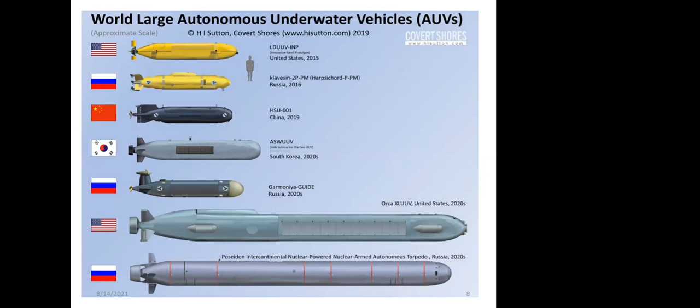Okay, now the next one is unmanned ground vehicle. Just watch the video, after that we can come back to it.

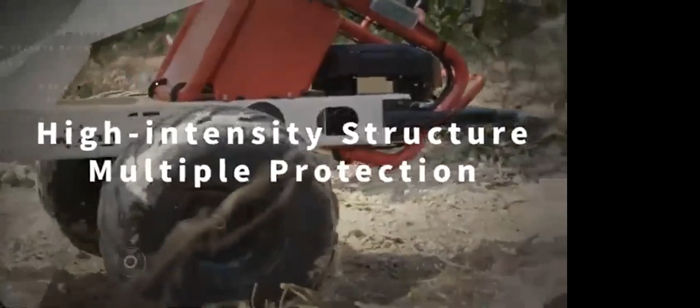Actually, this is a sample unmanned ground vehicle. I don't want to show you the prototype and other things; what I want to convey from this particular video is...

Nowadays unmanned ground vehicles we are using for so many purposes. As I said, agriculture, military applications, and for delivery applications of goods. So many things we are using it for.

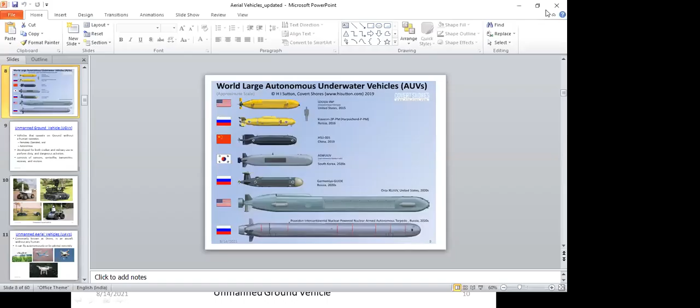What we can do actually, based on the experience with our students, I want to give you one small video so that you will understand what we can do in unmanned ground vehicles. Just watch this video so that you will understand.

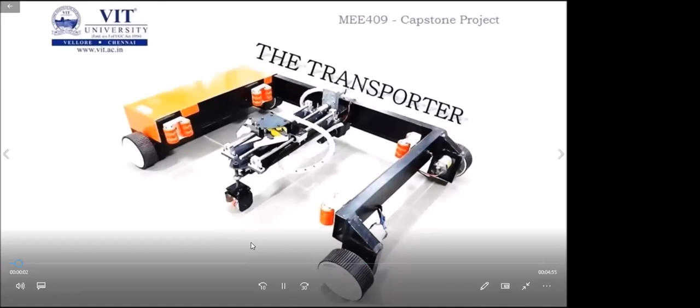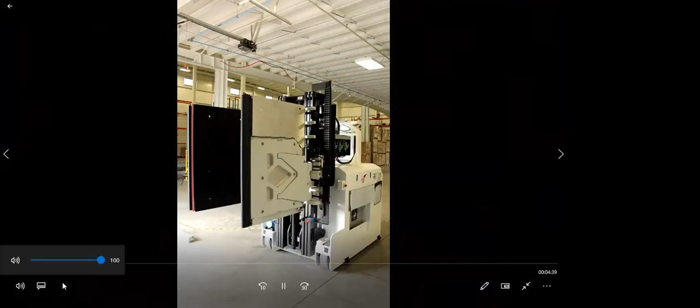So wherever warehouse application is there, we can use this kind of unmanned vehicles. So these many companies are there which are involved in material handling applications.

Just think of it. Okay, but they are developing all these unmanned ground vehicles for delivering goods. These many companies are there.

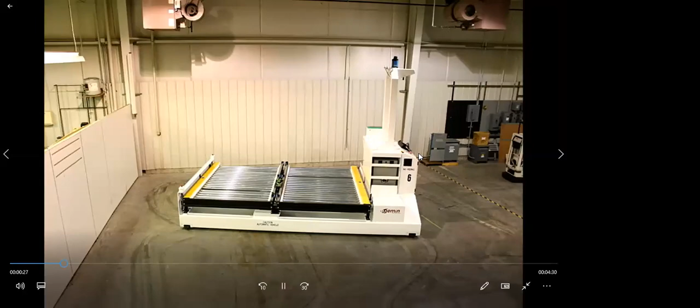These are some of the operations of that. Just watch the video, then I will convey to you what kind of work you have to carry out.

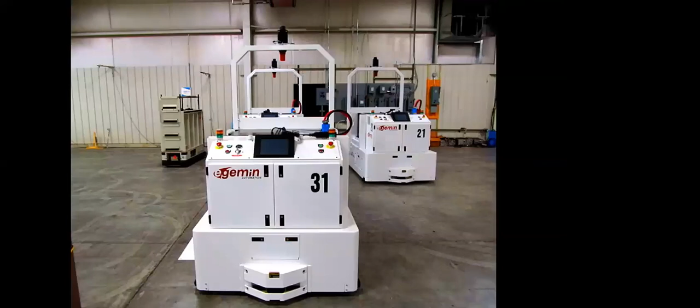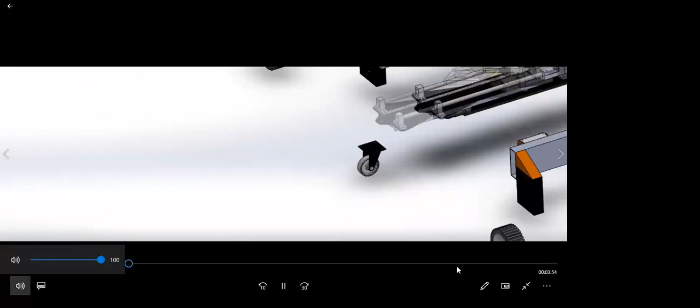Sir, it's a bit hard to hear the audio. Okay, sorry for that. Please can you use the headphone? Otherwise I will share this video with you. Will that be fine? Okay sir, at present.

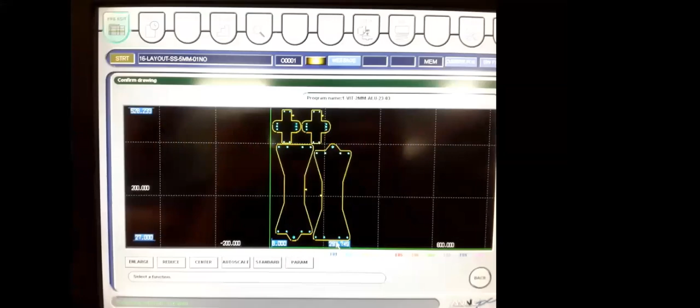So what I want to convey is, we got impressed with all these things. Oh, these many companies are making material transferring robots. So what can we do as engineers?

So what we did is we got an idea from all these things, and we wanted to do a kind of material handling, semi-autonomous or autonomous vehicle. This one is manufactured in VIT Chennai.

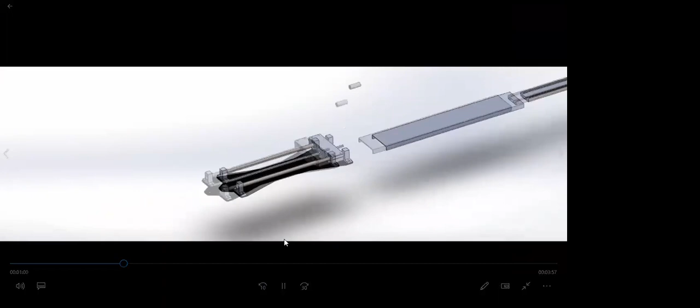So you know that mechanical engineers, or any engineer interested in designing, can design like this. We have used SolidWorks for that. This is our own design.

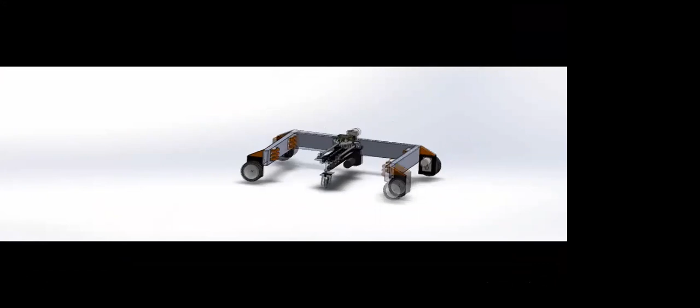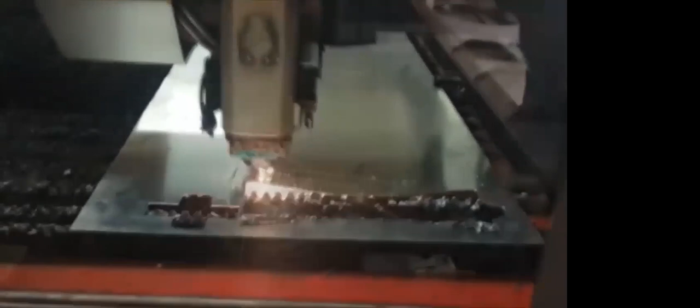And then what we have done is we started manufacturing that. We have taken sheet metal with some thickness. All these things are done in VIT Chennai itself.

And then we have made the frame. This is the frame actually. After that, as usual, you know, coloring and other things.

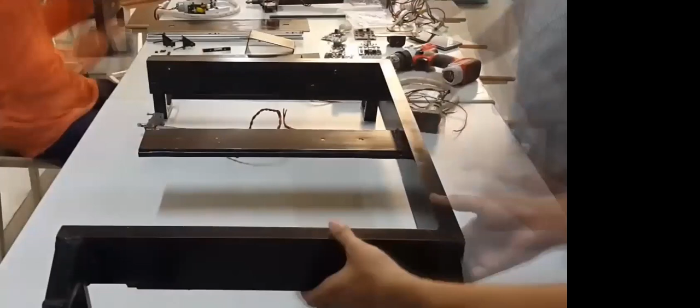So these are the parts what we have fabricated, and then we have assembled it. That's what I meant - if you want to develop any kind of vehicle, we need all the disciplines of engineering involved. Then only can we do all these things.

You see, wiring, everything done by us. So based on the wiring, the structure will vary. The placement of the controller, the structure may vary. You can see here now.

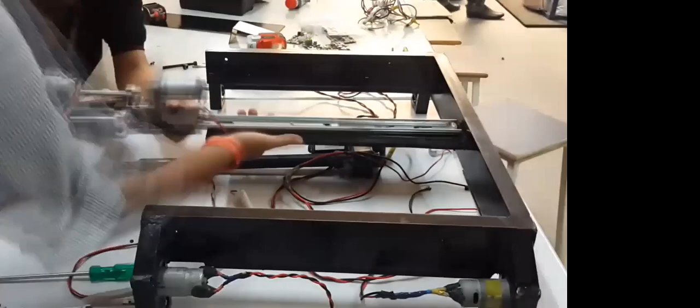So we have fixed everything according to what we planned. And we need another setup to keep the controllers. You will see now how we have placed the controllers.

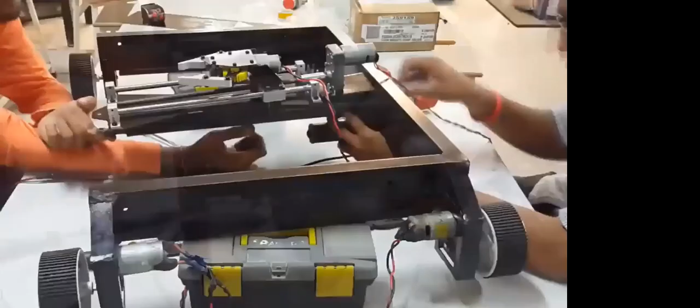So these are the assemblies. Based on the requirement, we have modified the wheels also, and additional support wheels also we have given for 360-degree movement.

See here, now we have given additional support to keep all the controller system related things, all the ICs, everything. So all these things are based on the idea we have made it.

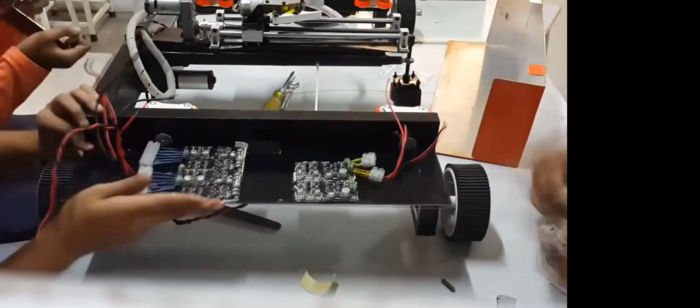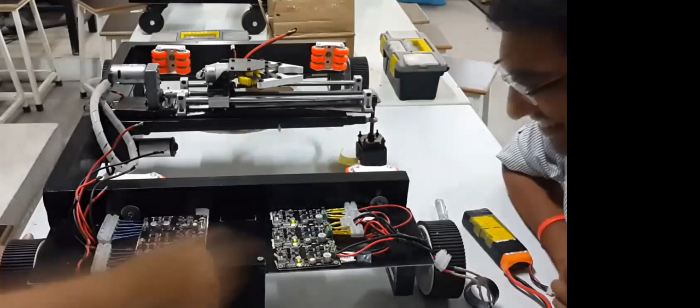So these are the circuit boards and other things, control systems diagram. And then programming, as I said, we are checking it one by one, how it is used. So when we are building the things, we learn so many things.

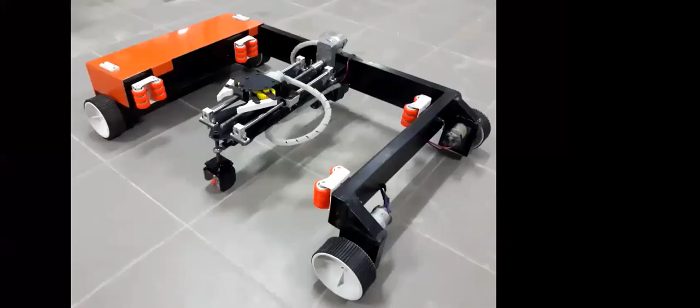Initially we checked with manual mode, and then after that we made it automated. This is purely based on the video what we have seen in Amazon.

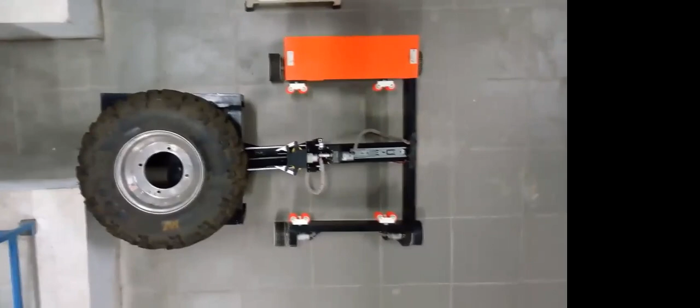Then we wanted to make this one prototype, and give it to maybe a railway station, or an airport area, where it will be used to carry materials or bags or anything like that. We only plan it, and we filed a patent for that.

So all these things are unmanned related things. Anyway, we will see the aerial vehicle soon. This is a ground vehicle.

This is the important thing, why we have manufactured this and why we have tested this: an automated guided vehicle control system. You will see all those things, how it is delivering and how it is coming back. This video will only help us to show that product.

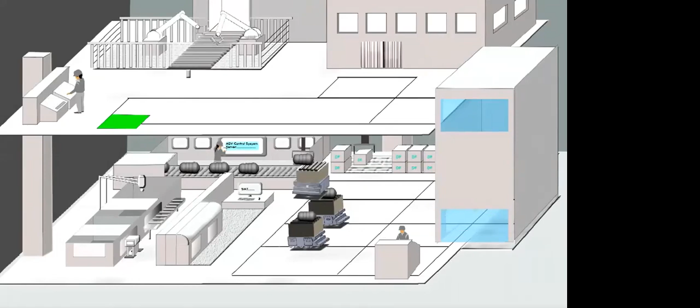This is nothing but factory automation, otherwise called warehouse automation. This is the team actually.

What I want is, whatever you are learning from this particular course, try to implement it as a project. Then only we can learn more about that.

Now coming to unmanned ground vehicles: vehicles that operate on ground without a human operator. They can be remotely operated or autonomous, developed for both civilian and military use, to perform the 3Ds of robotics: dangerous, dull, and dirty activities. All these vehicles have a sensor, controller, transmitter, receiver, and motors. These are general descriptions about this.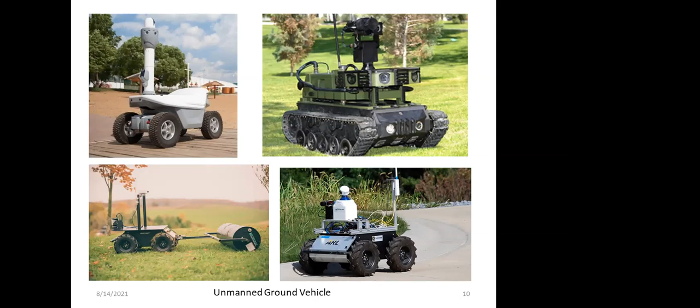These are some of the other unmanned ground vehicles used for various applications: one is for surveillance, another one is for applications on the ground, another one is for military purposes. Now we are coming to our area, that is unmanned aerial vehicles.

Maybe I can play a video for you. Hope the screen is visible. Yes sir, okay, thank you.

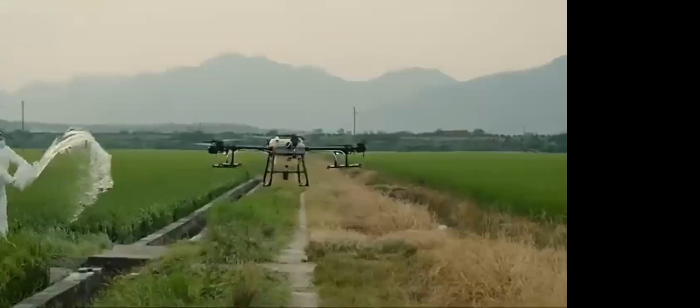This sample video I have taken for showing you the unmanned aerial vehicles. This is not the only application, but majorly we are concentrating on farming, because food is the important thing in our life. Agriculture is booming, it is needed throughout our life. So we are concentrating more on unmanned aerial vehicles in the agriculture area. That's why I have put that particular video.

Commonly known as a drone, it is an aircraft without any human, that is an unmanned aerial vehicle, and we know very well it can fly autonomously or be piloted remotely. Most of you would have seen it because of the COVID condition: wherever people were crowded, where we could not reach in short time, we used to send a drone and monitor that, and give an alarm to them. Other things also there, to see what other areas are there and take pictures, so if any modifications are needed, we can check with this unmanned aerial vehicle.

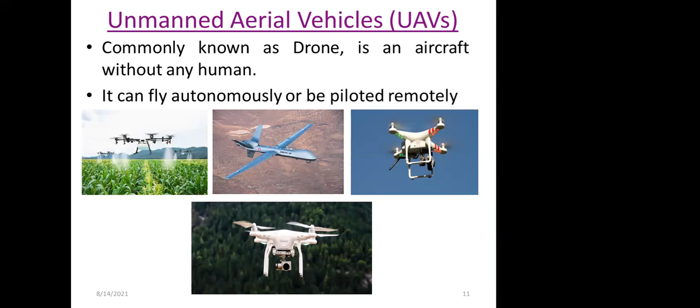Whichever area you want to concentrate on, whether it is autopilot or you want to remotely pilot the drone, or you simply want to send it for security purposes, or use it for agriculture purposes, it's up to you to decide. We are just giving some glimpse of that.

Now we will come to this, as one of our professors and also students asked. We have different types of drones: multi-rotor, fixed wing, single rotor, and fixed wing hybrid VTOL. I want the people who are working in this area to give me some suggestions: which one will be good for what purpose? Anyone?

Multi-rotors for agriculture, very good. Multi-rotor agriculture, why? Whenever we say something, a reason should come, why? So they can have more payload. Very good word, well said. Sir, they can hover in one place, multi-rotors. So multi-rotors can be used for payload, for search and rescue. I accept it.

Fixed wing drones can be used for mapping and surveillance. Oh yeah, that is generally for mapping, surveillance, and military applications. But my question is, why should it be multi-rotor? That is my question actually, not only my question, the students here also ask: why should we have multi-rotor, why not fixed wing?

More control about the orientations and motions, I think so. Okay, that is correct. Multi-rotors have VTOL and stall capabilities, so in space-constrained zones, multi-rotors are more efficient, and the fixed wing drones are more cost effective. Very good, that's only what I wanted to know.

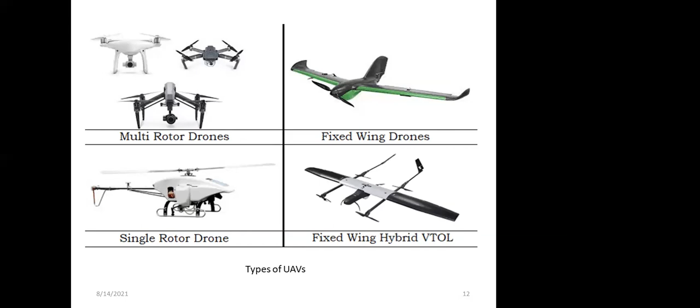The thing is, what I want to convey is recently we got some papers from IIT. Actually, they started working on fixed wing drones more than multi-rotor drones because of the dynamic instability. Just want to give a light on that; in detail we will see later. From this slide, you have to understand various types of UAVs are there: multi-rotor, single rotor, fixed wing, and fixed wing hybrid. That is the thing you want to know. In detail, we will study in the forthcoming classes.

Okay, now based on this particular presentation, I think one video we have seen. I want to give the unmanned vehicles conclusions. So what are the things we have seen? You know that underwater vehicles we have seen, and surface vehicles we have seen. All these things are in the infancy till now.

In underwater vehicles, the segment is maturing more rapidly due to the commercial use of this system by the offshore oil and gas industry. So those who want to go abroad and settle, and also those who want to work in the industrial area related to oil and gas, please concentrate more on underwater vehicles also. That will be an added advantage.

You know that we are taking oil and gas through the pipe only. For pipe inspection, we need underwater vehicles. Am I right? We are taking gas and oil through sea, right? Most of them from the sea only. Am I right? Yes, sir. So we are having huge pipes.

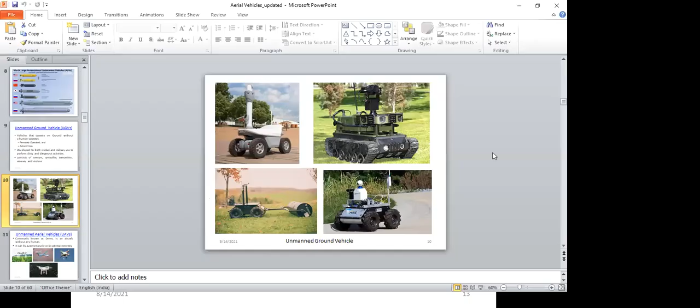I think we are having one video. I think I can play one. Maybe it will give some light to you. Just a minute.

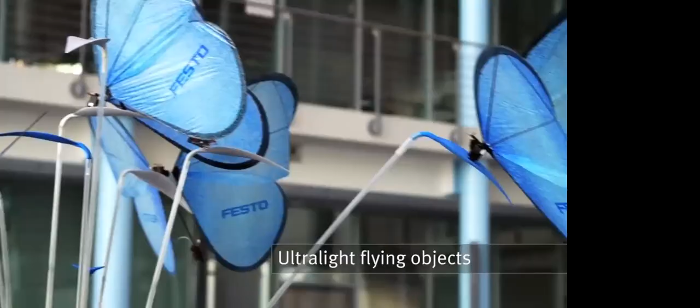So as you said, this unmanned aerial vehicle, Festo has created this. Hope you have watched this video, but just see that, as you said, actuator in micro and nano scale or millimeter scale. It's actually not a butterfly, it's a flying object, bio-inspired, biomimicking. Just think of it, what you said is here actually - that actuator is their own design. So what are they actually creating their own actuators for the control, sir? Exactly, you see that control is done by the magnetic effect, everything - highly integrated on-board electronics. Got it? So like our friend said, MEMS and everything, we have to create our own type of electronics apparatus. Just watch, after that we can have a discussion.

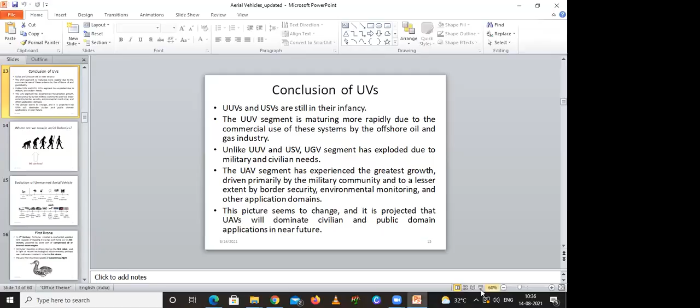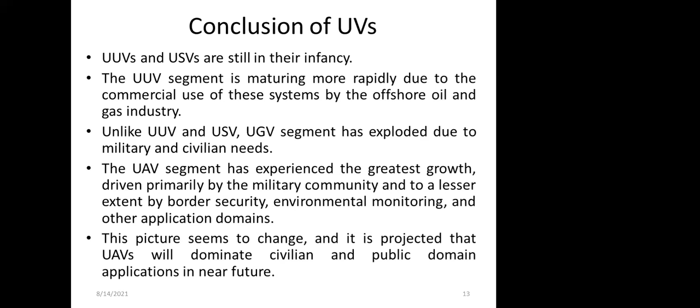It's a simple thing I want to convey to you. So as you asked, actuators we have to design by ourselves. As you said, noise and other things we can come across - wherever the thrust is there, definitely noise will come. But we have to find the actuator or controller which is not producing that much noise. That one we have to make on our own - own actuator design.

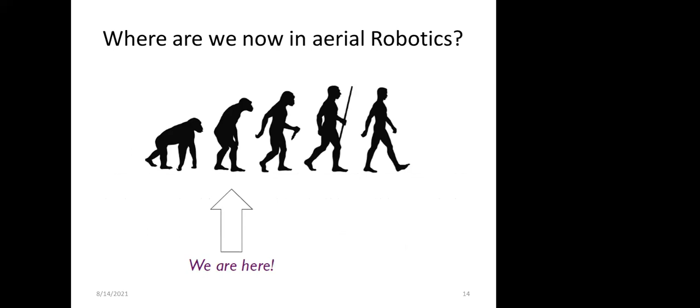So coming to our aerial robotics, actually we are in the second stage now. Long way to go. Now we will see the history of unmanned aerial vehicle. I hope this will be a help to you.

425, 1483, 1754, 1783, 1840, 1860, 1849, 1900 - Tesla. 1917, 1924, 1935, 1944, 1946, 1955. These many variations you can see, the growth you can see in unmanned aerial vehicle. Did you come across all these things?

Any idea about this? Did anyone come across any of this in unmanned aerial vehicle? Did you hear? Sorry sir, please repeat again. Whether you came across the growth of unmanned aerial vehicle - where it started, 425, now we are in 2021.

I remember hearing about Da Vinci's helicopter. Yeah, exactly, Da Vinci, even I also - but this is new to me. When I went to refer some slides, 425, I got shocked actually yesterday when I was researching. 1483 I knew, Da Vinci I knew, but 425 itself, boy. You know who started unmanned aerial vehicle.

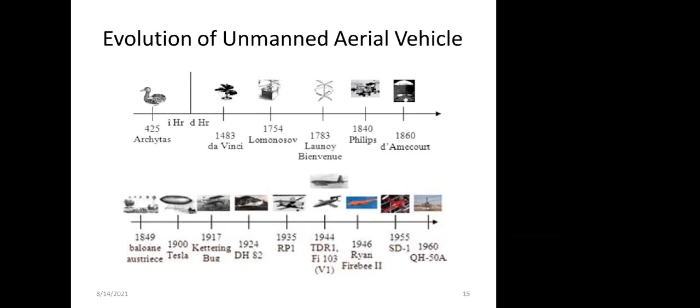We will see a few of them and then proceed further. The first drone is from the 4th century. You know who created it? A mechanical wooden bird capable of flapping its wings and flying up to 200 meters. Please make a note of it. What I'm saying is these are history - anyway I will share the PPT with you. But you have to know that once you write it, you won't forget it. So: mechanical wooden bird capable of flapping its wings and flying up to 200 meters, and it is powered by compressed air or an internal steam engine.

So they are citing this as the first robot, but you know, the term robot came in only in 1920. Before that, we didn't use the word robot. After that, we said that this particular drone is the first robot.

This seems very advanced for the 4th century. Exactly, you see the complexity involved in that. Even we can do that, right?

A lot of what you said is correct. When we are seeing it now it seems complex, but it's quite good. They have done it, and you can see that it could fly up to 200 meters using compressed air and an internal steam engine. This is also bio-inspired. It's the very first machine capable of autonomous flight. Okay, fine, shall we move to the next slide?

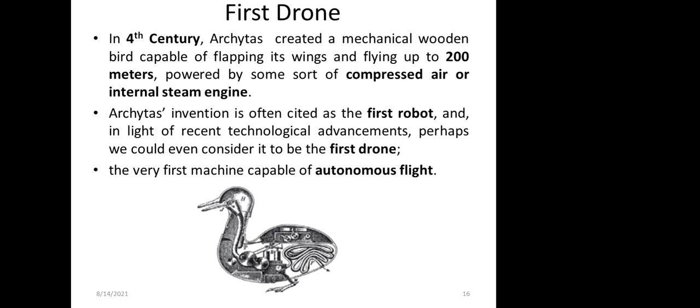Okay, but the book is written after that, so they would have used the actual terms that we are using now. Okay, this is about the first drone.

So coming to the next one, most of you would have seen this, but those who haven't, please make a note of it. In 1483, Leonardo da Vinci designed an aircraft capable of vertical rise. Most people say that nowadays this is actually the first helicopter. Please note it down, 1483, capable of vertical rise.

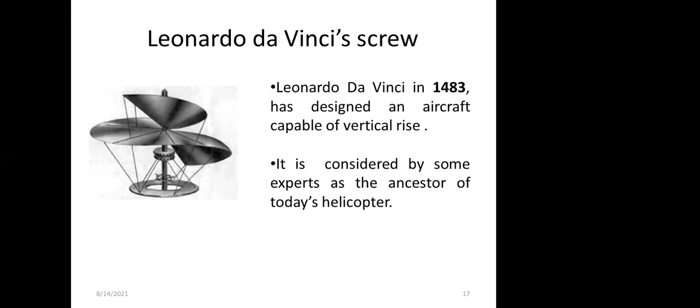Okay, next one, see the arrangement. I think you can see some videos also, it's available on YouTube, I didn't include that, maybe in the next class I can put it, maybe next week. This is the 1754 axial rotor, we have used the axial rotor. Note it down: Lomonosov, 1754. And another one is the contra-rotating propeller, 1783.

So in between, so many things are there, but I'm just giving you a few glimpses of unmanned aerial vehicles. So these are the profiles, and you can see that all these are rough sketches, not actual CAD or anything, purely based on creativity. So we have to go back to that, we have to keep on thinking of what we want to do in a rough sketch, and after that proceed to make it an actual prototype, like what we did with the underwater robot and the transporter, and a few more devices also we have made.

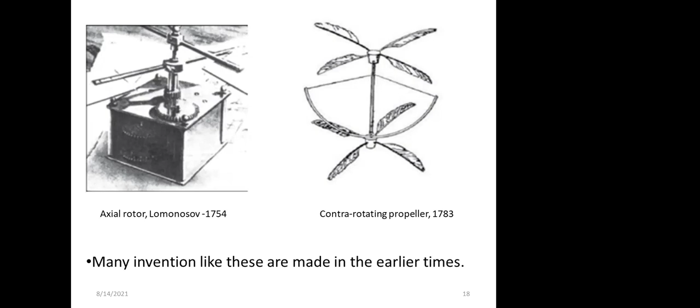Okay, fine, the next one is we are coming to this. The UAV hardware platform is a single unit of a much greater and complex system. The older versions of UAS will have more frequent interfacing between the UAV and the ground control station to define flight details like path and altitude. These are some of the complexity about this.

But what happened recently is UAVs are programmed with an extremely high level of artificial intelligence. Please make a note of it. If you want to work in UAV, first thing you have to do is register for a course called artificial intelligence. Next semester, please register for the course called control system development, otherwise sensor based control system. Then please try to learn something related to machine learning and deep learning.

Programming is main if you want to make any kind of device more intelligent. Please make a note of it. Programming knowledge is a must. For artificial intelligence, machine learning, deep learning, or these kinds of AI techniques, if they are asking you to learn Python, please start learning Python right now. That is needed, because the world is moving towards computer science, so we are unable to overcome that. We should have programming knowledge.

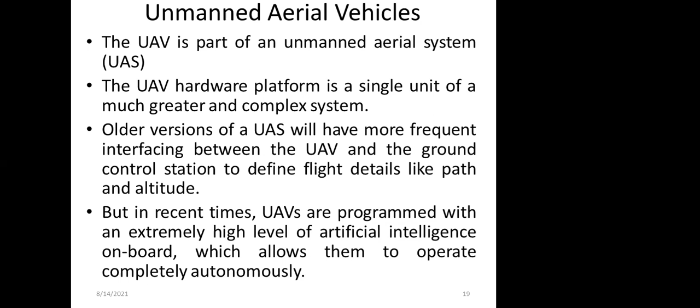If you want to say the system is intelligent, at present we can say that is done only by advanced programming techniques or algorithm techniques, whatever it is. So please concentrate more on that if you are really interested. Otherwise, you will make the drone with a good structure, with good control systems, but we may need some experts in programming that and then executing it. It will take some time, I'm saying. So now itself you concentrate on those areas also. So many open source resources are there, so many online videos are there. You can learn it, but it's better to study it as a subject, so you will learn much better.

So these are the types of UAVs we are using in recent days. All those things are there. I think the last one you know much better.

I think so, there is also a biomimic. Can you tell me what kind of biomimic that is? The last one, I think... It's a jellyfish, sir. Yeah, please, it's a jellyfish. Yeah, exactly, jelly.

Okay, so many videos are there at present. We will see what variety of unmanned aerial vehicles are out there. There's A, B, C, D, E, so many are there, F, G, H. Biomimics are too much - what is that unmanned aerial vehicle, you know, Garuda. So many things actually came, and they are doing really good output too.

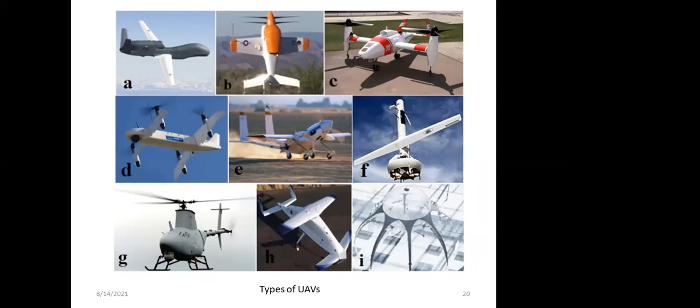And then, okay, now we will come to quadcopter. Just to see what other things are there so that we can proceed further.

So how many of you designed a quadcopter? Or how many of you worked on a quadcopter? Sir, I've worked on a quadcopter, I've made and designed a quadcopter.

Okay, Mithil, good. What is the difference between tricopter and quadcopter? Maybe you will know, because you worked on that. Can you tell me what are the disadvantages of a tricopter? I took part once in a quadcopter workshop, and there I designed a basic quadcopter.

Oh yeah, great, very good. Okay, fine then. Actually it is online, we could not arrange it. If suppose we are organizing the next event, once the conditions are over, definitely I will organize a 3 day hands-on session. Hands-on in the sense hardware. Maybe I can make it for all the VET students free of cost. I'll discuss and then I will make it, maybe once the conditions are okay.

Now, our question to all our friends is, why are we moving from single blade to 2 blades, 3 blades and 4 blades, and why is 4 blade dominating now? Why? What is the reason behind it? Anyone? Balance, two points?

Balance between thrust and cost. One is balance, very good. What sir, about the other? Stability. Balance, it's involving stability. Yeah. Sir, less power consumption. Are you sure? Yes sir. There are 4 motors. You want to say that power consumption per motor, am I right?

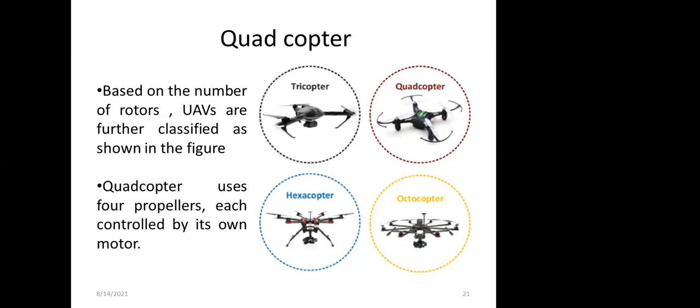Sensors, okay. Can I say that the number of sensors are less here? Which one do we have for that? What kind of sensors do we have? Accelerometer, gyro, okay, those are other things. Instead of that, we are having only one sensor, that is camera, that is the vision sensor we are having, am I right? Yes sir, yes sir.